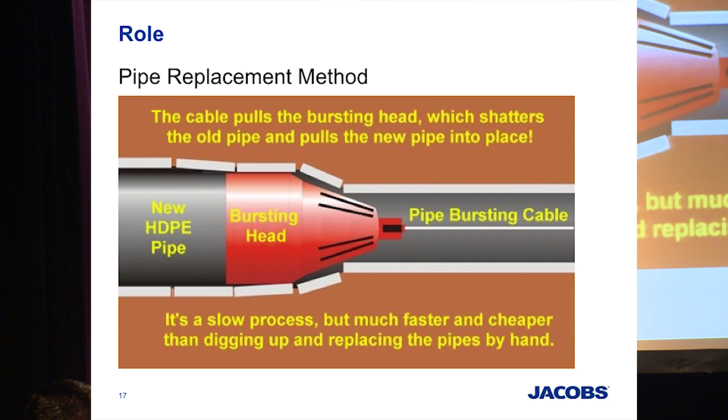One of my roles within Jacobs is to design new water networks, maintain existing water networks and replace old water networks. An example of replacing an old water network is a technique called pipe bursting. Behind me is the process taking place. As you can see, the old pipe is being broken by the bursting head, while the new pipe follows and is installed.

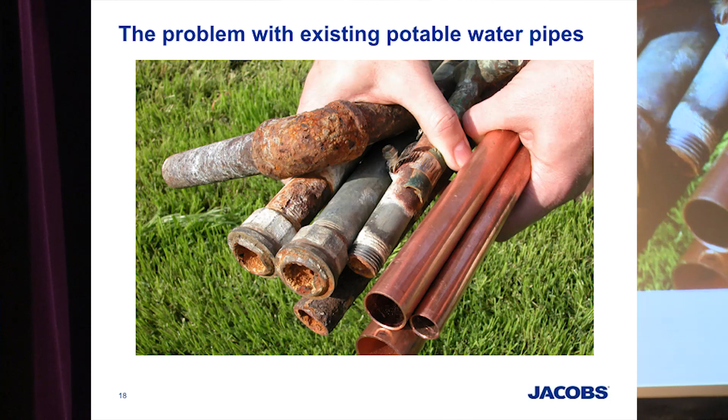I will now show you an example of this using props. So, if you can imagine, the inner circle here is the existing pipe, and this is the new pipe wanting to be installed. So, if there's a bursting head on this new pipe, and it's pushed in, as you can see, the existing pipe will be broken, and these fragments are left in the ground.

Moving on, the problem with existing pipes. A problem with existing pipe networks is that pressure within the pipes can be too high, which can lead to ruptured pipes and damaged fixtures. I will now demonstrate high pressure in pipes. So if you imagine this balloon is a pipe, and the air going in is water, as the pressure builds, the pipe becomes weaker, and eventually, the pipe will blow, just like a pipe would.

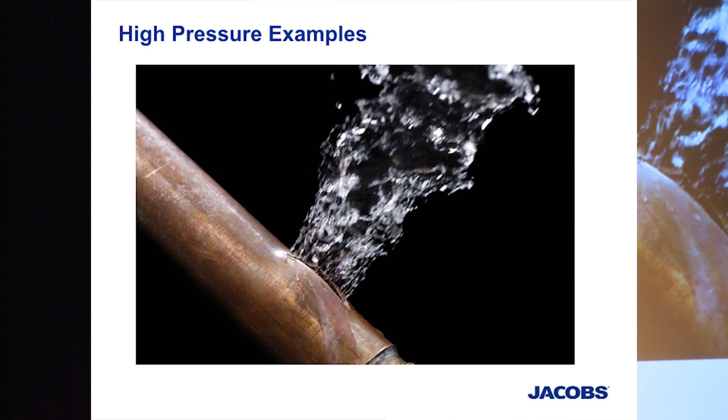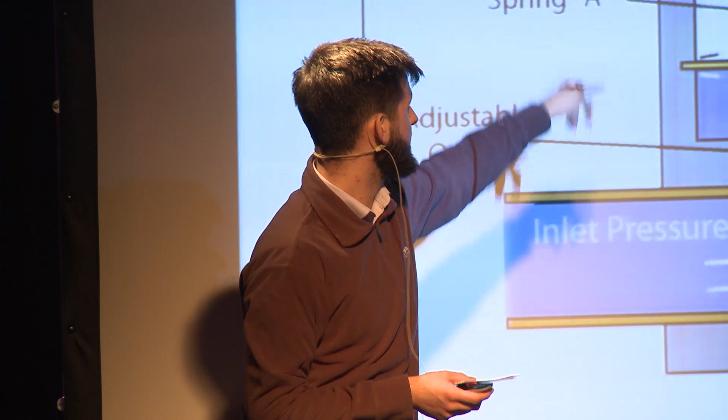This is a pressure management valve, and it works by allowing water to pass through the pipe into this chamber. This chamber can then be controlled by the turning screw. So the higher the turning screw, the lower the pressure within the chamber, which means the lower output pressure. The lower the turning screw, the higher the pressure within the chamber, which means the higher output pressure.

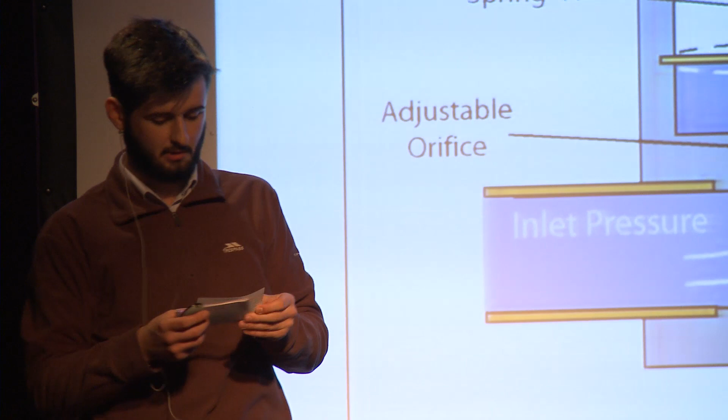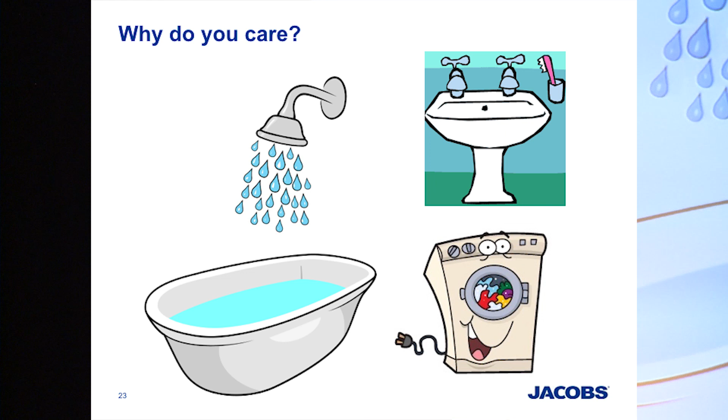So, why do you care about this? Do you like a good constant pressure when you're in the shower or when you're turning on your tap? Well, from the work we do, we can help design, maintain and replace water networks. Well, what a fun night we're having. Thanks for listening.

Joshua Shannon, ladies and gentlemen, let's hear it for him. Let's hear it from the judges. Joshua, never easy going second, never mind first.

I, by my own admission, can barely change a light bulb, so I'm not going to ask any technical questions other than, can you do anything for me as a citizen with the threat of burst pipes with all this frost? Every morning I wake up, I think I can cycle to work, but I can't because it's so frosty. Any advice in terms of progress in avoiding burst pipes at home? Well, in old pipe networks, PMVs aren't there, so the pressure isn't controlled. But when PMVs are installed in the new networks, the pressure can be controlled, and bursts will probably not happen as often.

Thank you. Well done, Joshua. That was really interesting. I just wanted to ask if this is something that can be scaled down and used in homes as well as on large networks? I wouldn't particularly know the answer to that because I'm not based on doing homes. But I'm sure it could. Obviously, pipes within the homes are different, but I'm sure there are pressure management valves that can be used within homes. Joshua, thanks very much, and I think the answer is probably yes, because we can design smaller things for plumbing right into your home that take mains pressure, and that's where we're going.